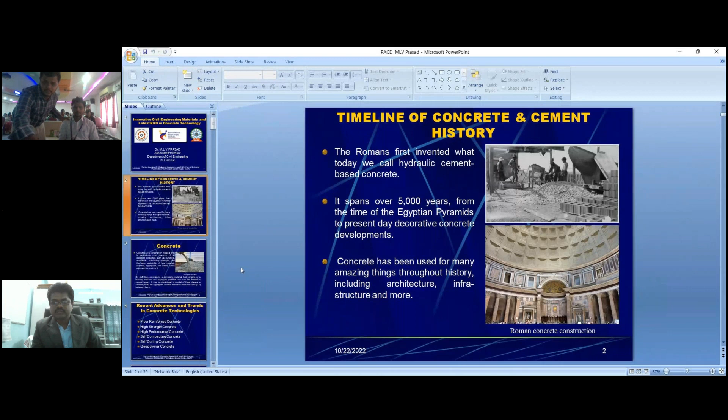So now we will discuss about the concrete.

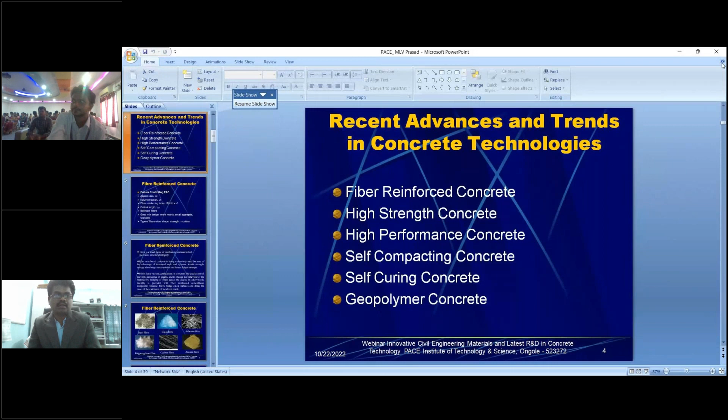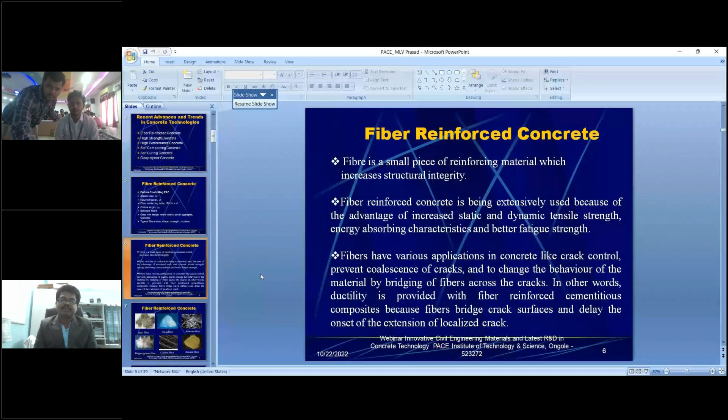If you take fiber reinforced concrete, I will tell you the advantage and where we will use it. Before that, we will see the different types of fibers we have: steel fiber, glass fiber, asbestos fiber, polypropylene fiber, carbon fiber, aramid fiber, like that.

So many new things are coming. Some are useful at the micro level, some at the macro level. So basically, wherever I want to develop the tensile strength of the concrete, increase the modulus of rupture, Young's modulus, flexural strength values, then automatically I prefer fiber reinforced concrete.

Suppose you are constructing a slab, and the rainy period is very high, there is a chance of leakage of water from the slab. Then you can go for fiber reinforced concrete.

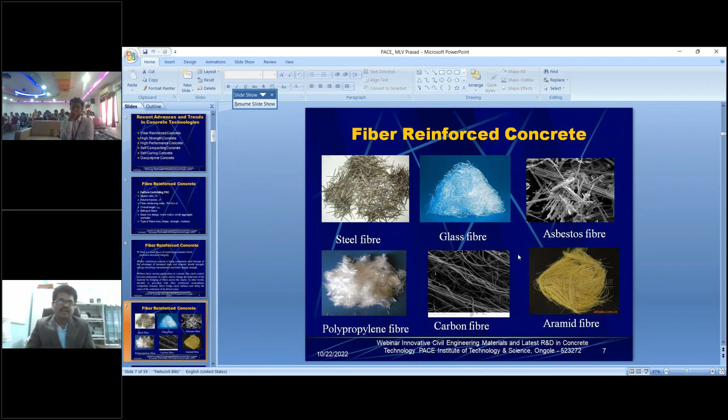If you use fiber reinforced concrete, the advantage is it is going to arrest the cracks, and make the concrete in such a way that there is no leakage, because fibers are very good in arresting cracks and have very good bonding with the concrete. So this is going to be useful.

If you see the fiber reinforced concrete stress strain diagram, after ultimate, if you see the area under the curve, A1 and A2, indirectly we are improving the ductility of the concrete. Ductility means toughness of the concrete. Total area divided by area of A1, that will give you the toughness of the concrete.

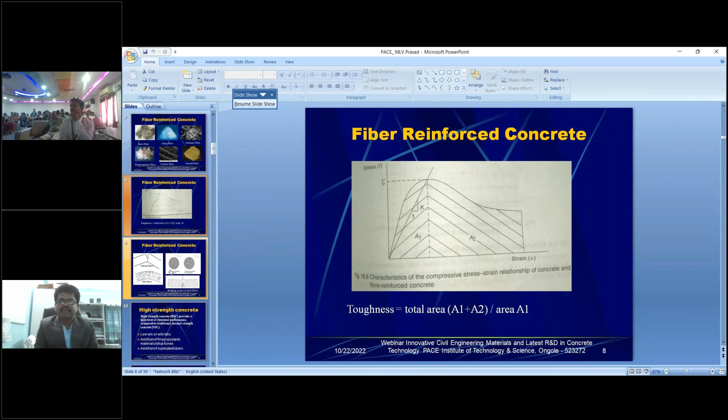So without fibers it is going to be very brittle, but with fibers, rupturing of the concrete or flexural rigidity is going to be very much improved by utilizing fiber reinforced concrete. So nowadays so many types of fibers have come.

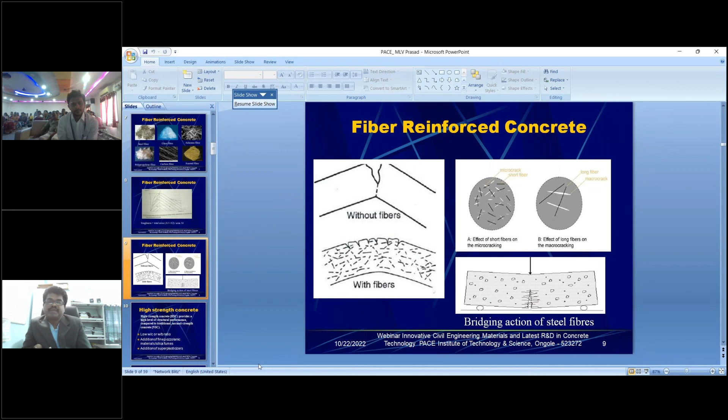Even in FRP, in retrofitting techniques also we are going to use these sheets. So this is a very wonderful material which improves the tensile properties, modulus of rupture, flexural properties of the concrete. Based on the requirement, we decide whether fiber reinforced concrete is used or not.

Next, coming to high strength concrete - we already discussed normal strength concrete. In normal strength concrete, we can achieve up to a grade of M50 or M55. After that, I am not able to develop the concrete further.

So suppose if you are in metropolitan cities where the land cost is very high, in those cases definitely we have to go for high-rise buildings.

Let us say G plus 10, G plus 20, G plus 30 like that. If you are going like that, automatically you have to develop a high strength concrete which has higher strength characteristics. Mainly in the columns we are going to use M60, M80 like that. Suppose I am constructing something in New Mumbai, then definitely it is going to be G plus 50 or G plus 80. I cannot waste my land, so for that purpose, definitely I have to think about high strength concrete.

So in case of high strength concrete, there are certain conditions. If I want to get a high strength concrete, I have to maintain a low water cement ratio. Then addition of fine pozzolana materials like silica fume, fly ash, GGBS, metakaolin, rice husk ash, like that. We have to add some pozzolanas to improve the pozzolanic activity and to get the high strength concrete.

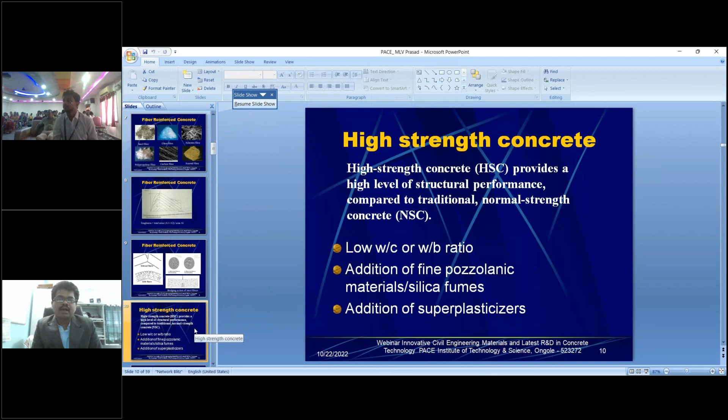So now, if you go to the high strength concrete, how to prepare it? What is the simple difference between normal strength concrete and high strength concrete?

If I want to get more benefit, there should be some limitations on material usage. When it is used for high-rise buildings, the sizes are going to be slenderer, so there is a limitation on the coarse aggregate content. That means the size of the coarse aggregate is going to be reduced to a maximum of 16 or less, otherwise I will go for 12 only.

And definitely I am going to use supplementary cementitious materials like fly ash, silica fume and others, but different dosages are fixed based on the different type of material. Suppose it is silica fume - since silica fume has high water absorption capacity, high range admixtures are used as a super plasticizer when silica fume is added. That's why its dosage is only 5 to 10%.

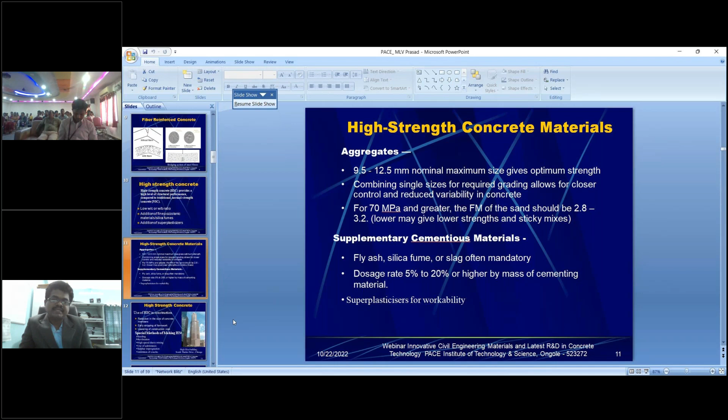But if I am using fly ash, I can go up to 20 to 25%, even up to 30%. Silica fume, fly ash, GGBS - all are ashes only, but there is a small change in the collection process. Based on how you are collecting them, they are given different names. Nowadays even JSW is using slag, which is also one type of ash. But depending on how you collect it and its fineness, we give different naming to these materials.

In case of high rise buildings, let's say G plus 80 or G plus 100, strength is a very important parameter. So in those cases there should be reduced size in the member, early stripping of formwork, and lowering of construction cost - all these are very important parameters, so we keep all these in mind.

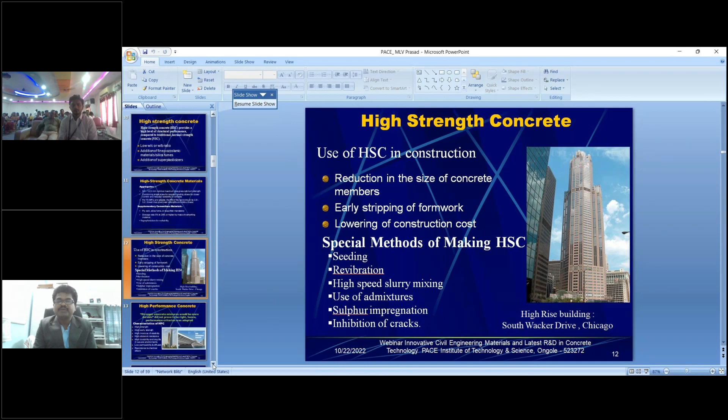And there are different methods of developing high strength concrete. Even IS 10262, whatever is newly developed, gives the option of developing the concrete. But earlier, by using IS 10262 - as a student, what I will say is you should be thorough with the codes.

What are the codes available?

Civil engineering is very easy if you know the source material. I always recommend civil engineers, as they have better opportunities compared to other branches. Why? Because nowadays computer science is the common language for every person.

For example, suppose I want to develop a mix design, even for high strength concrete or self-compacting concrete. If you go in a manual way, it will take so much time. Instead, if you write some coding to develop the mix design using the same procedure, you just give the input and it will give the output. Since you are third and fourth year students, my sincere suggestion is to start with something simple.

First, try to write a program for the mix design as per IS 10262. Let's take an M40 grade concrete. What data do you give as input? If I give the properties of the cement, the properties of the coarse aggregate, the properties of the fine aggregate, and the water-cement ratio, all these things are calculated step by step. So try to prepare an Excel sheet first for the mix design.

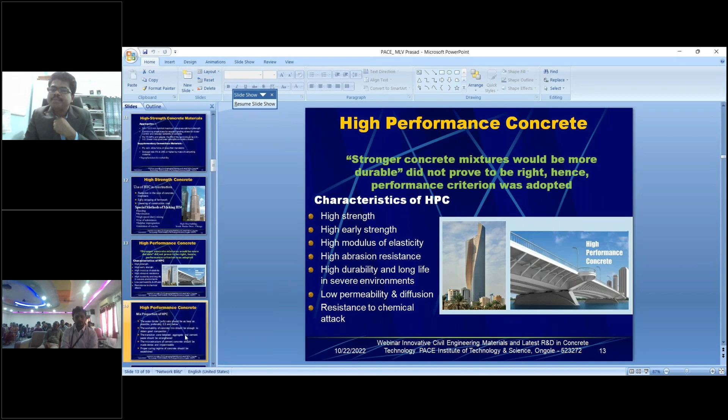Then obviously for high strength or high performance, we are going to have a lower water binder ratio - I say water binder, not water cement, because whatever cement is required for the hydration process and to gain strength, that much of cement only I am going to use. I am not going to use cement as a filler material or as fine material. Whatever minimum cement is required for hydration and to get strength, that much only I am going to use here.

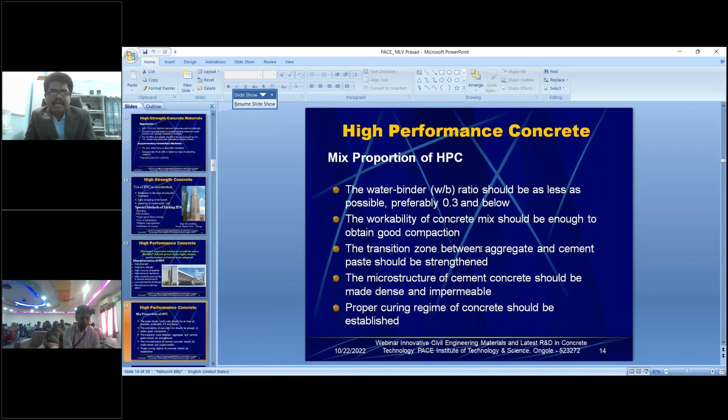Then the other part I am using as a binder - I will add fly ash, or GGBS, or silica fume. Like that, there are some changes I have done in the preparation of the mixes, and I am going to see that I am able to develop the high performance concrete. Obviously, whenever it is not durable, you can see here what are the durability problems.

Abrasion resistance, blast resistance, permeability should be impermeable. Actually, concrete should be impermeable. Then there should not be any carbonation problem, and it should have freezing and thawing resistance.

Durability criteria means that once concrete is developed, it definitely undergoes some deterioration with time. If it is continuously deteriorating, obviously you will see durability problems. What are these durability problems? Alkali aggregate reaction, sulfate attack, acid attack, freezing, thawing, abrasion - all these are durability problems. So we have to develop a concrete which can resist all these.

Even in adverse environments, if sulfate attack is present, take seashore areas for example. If construction is near a seashore, or near the sea, like IIT Bombay or NIT Surathkal, they are very near to the sea. Whatever buildings you construct there are going to have the sulfate attack problem. This sulfur forms a layer on the surface of the walls, and that creates the problem.

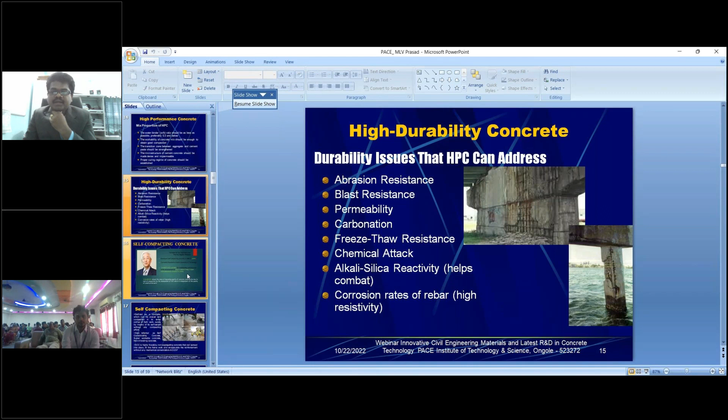So we initially started with lime mortar. Lime mortar is actually good, but it takes so much time. You have to grind it for many hours before you can use it as mortar. Strength-wise it is good, but time-wise preparing lime mortar takes too long, and that much time is not available to us now. That's why we developed cement.

After normal strength concrete, we thought that for multi-storied buildings, normal strength is not sufficient - I have to go for high rise buildings, so we needed high strength concrete. Then, with failures we observed, it tends to fail suddenly. There is no time gap, and it is not durable. It gives strength, but if it is not durable, it is useless. Then we thought of high performance concrete.

Even high performance concrete is good performance-wise, but the problem is from a cost point of view. Developing high performance concrete requires skilled labor, because so many technical aspects are involved - super mineral admixtures, chemical admixtures. I have to prepare it with good materials and need technically qualified labor. But nowadays, getting materials is easier than getting labor. Labor costs around 700 to 800 rupees per day per laborer. Even using 6 laborers to prepare 1 cubic meter of concrete, we end up spending around 10,000 rupees per cubic meter - and that's a minimum estimate. With this, constructing a multi-storied building using this much technically qualified labor is not going to be economical.

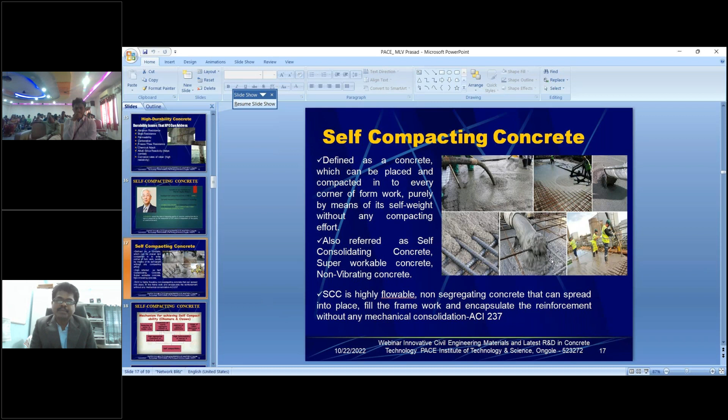In ready mixed concrete, generally they will make it as a flowable concrete. But here the difference is, if you see in the figure, they simply pour it with no need to use any instrument to compact it, because the mix proportion itself is prepared like that.

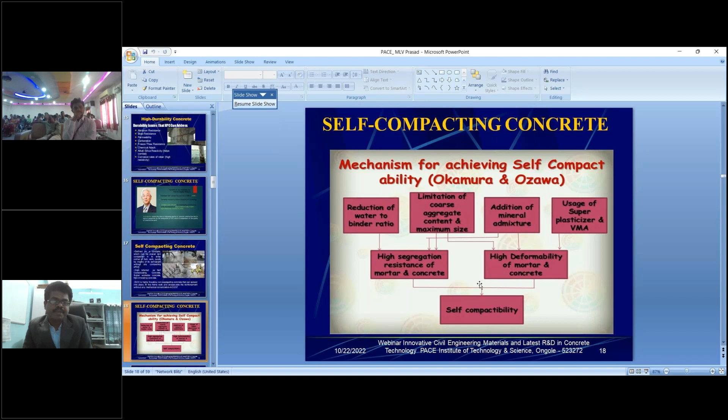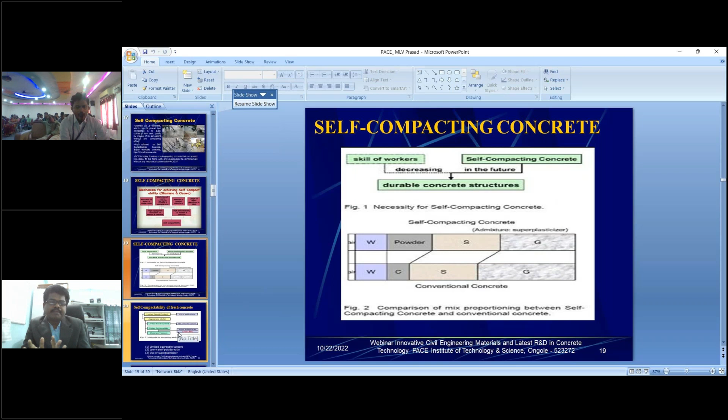When developing a self compacting concrete, basically three things are important: passing ability, flowability, and segregation resistance. These three things are important. We are going to say any concrete can pass when it has passing ability, flowability, and segregation resistance.

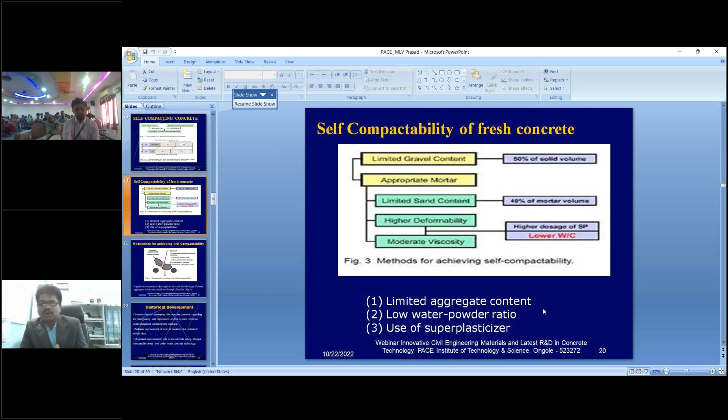So initially we are going to have the fresh concrete properties. To get the required fresh concrete properties, there are some limitations: 50% of solid volume, then 40% of mortar volume, then high doses of SP, low water cement ratio. All these things we are going to maintain here to develop these properties.

Particularly what happens, whenever you are thinking about a high strength concrete or high performance concrete, definitely there the reinforcement level is also going to be very congested. There is no chance of compaction also. Even if you think your budget is less and you want to go for normal concrete, there is no chance of compaction. So that's why there is no alternative other than self compacting concrete.

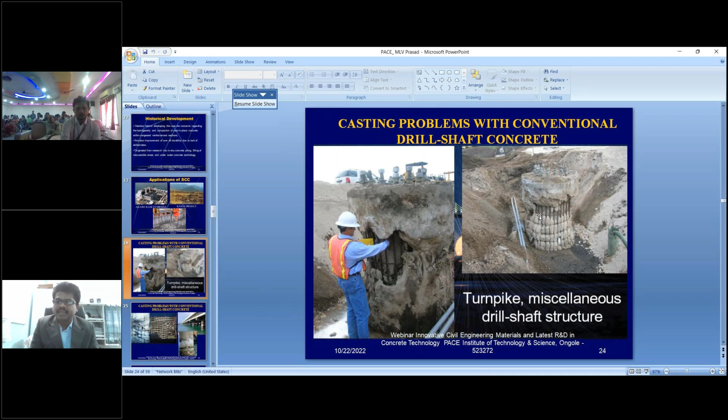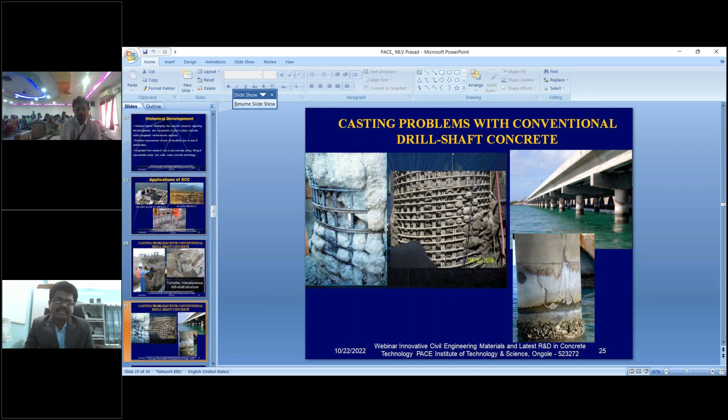That's why, particularly in congested situations when you are constructing bridge piers, abutments, embankments and all these, the requirement of steel is very high, and obviously it is going to be congested. In all these cases, self compacting concrete is going to be a very good material. These are some benefits.

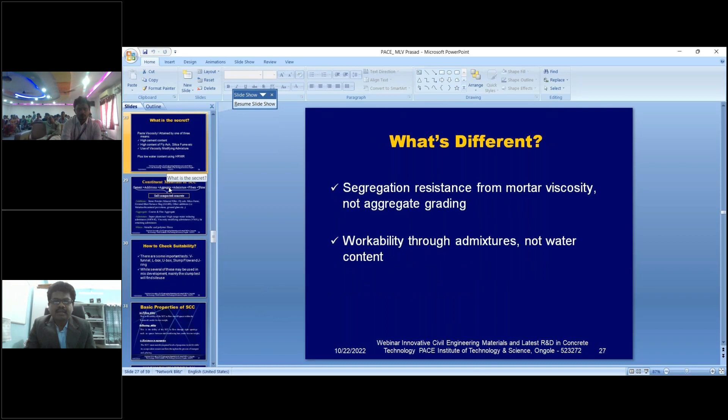What is the constituent material we are going to use, and what are the basic properties, basic tests we are going to see - I will tell you.

So obviously here it is a combination of cement plus additions like some binders, then aggregate, admixture. Even if you want, you can add fiber reinforcement also, no problem. Otherwise, you can develop a self-compacting concrete. But here, EFNARC guidelines are very, very important to develop all this.

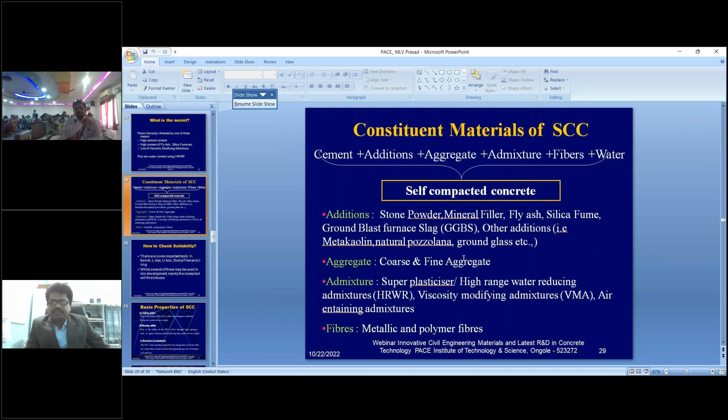These are the regular materials we are going to use, already told to you. But EFNARC has given some specifications particularly to develop this concrete. It has even given some limitations. For example, there should not be generally a cement limit the way our IS code gives a maximum limit - here in SCC they have given a minimum limit also.

Minimum 400 kgs of powder is required to develop any grade of concrete. Without 400 kgs of finer material - I am not saying cement, I am saying the finer content, whatever you are taking in the form of cement or binder - that should be a minimum of 400 kgs and above. Then only you are able to develop the self-compacting concrete.

Then there is a limitation on the water-cement ratio, and a limitation on the water also. They say in no case should you go more than 200 liters of water per meter cube of concrete - 200 kgs or 200 liters, because for water liter or kg is the same, since the density is the same. Okay, and like that so many limitations are there.

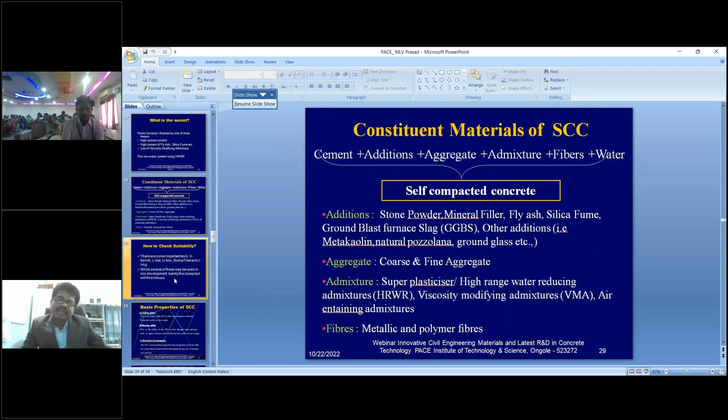If you follow that, then automatically you are able to get the self-compacting concrete. But how to check the suitability? How can I say it is a self-compacting concrete? For that, EFNARC, the European Federation, has given some guidelines called EFNARC, revised in 2005, with further revisions after that. If you type in Google just EFNARC specifications, you will get the complete booklet in PDF form.

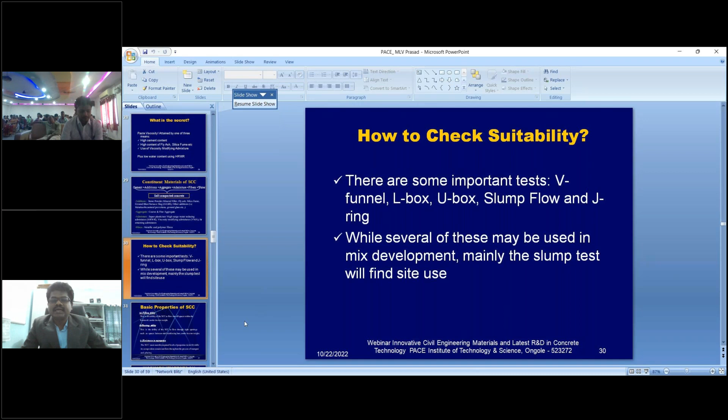So in that they have given this test procedure. When I am preparing an SCC, it should pass three tests: passing ability, filling ability, and resistance to segregation. Filling ability means, suppose if I am filling in any...

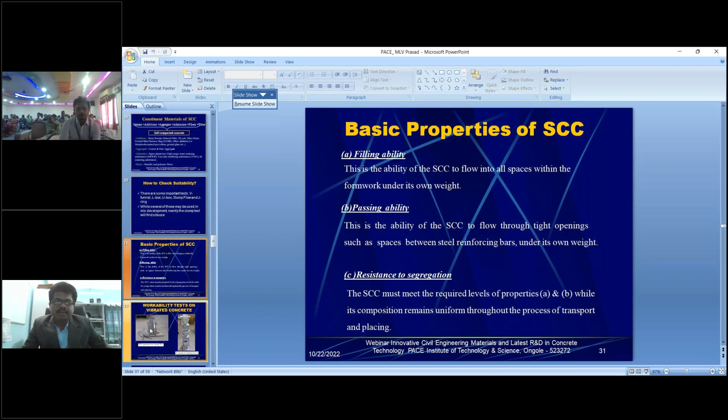Because here also we are going to do the workability test. So let's say, for example, if I am filling the cone and removing it, it should flow on its own weight - that is filling ability.

Then passing ability - for example, if you have a J-ring, with the J-ring I can check the passing ability. Passing ability means if some obstruction in the form of reinforcement is coming, the concrete should still pass through that obstruction without any problem. Inside the ring, outside the ring, if you measure the height of the concrete, it should show the same height. Then I can say it has passed the passing ability test.

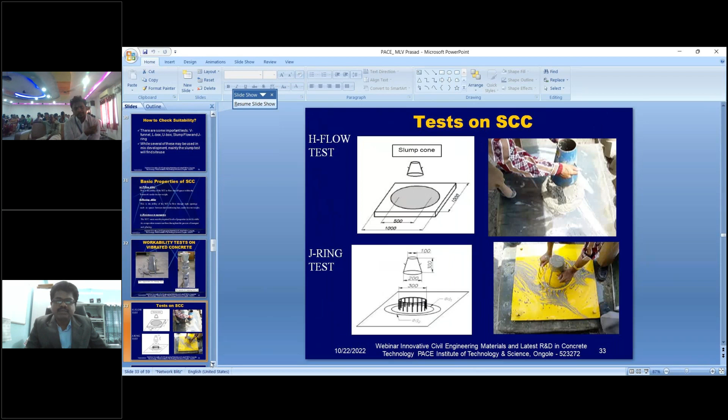Then after that I have to wait for 5 minutes, then release this knob. At that time, it may take a maximum of 2 to 3 seconds extra. Suppose earlier it took 10 seconds, now this time it may take 12 to 13 seconds.

If it is within that limit, then I can say - the main idea here is, I am pouring it in the V-funnel and waiting for 5 minutes. During this 5 minutes, it should not stick to the walls, and there should not be any problem with segregation resistance. If it is sticking to the walls, obviously it will take so much more time.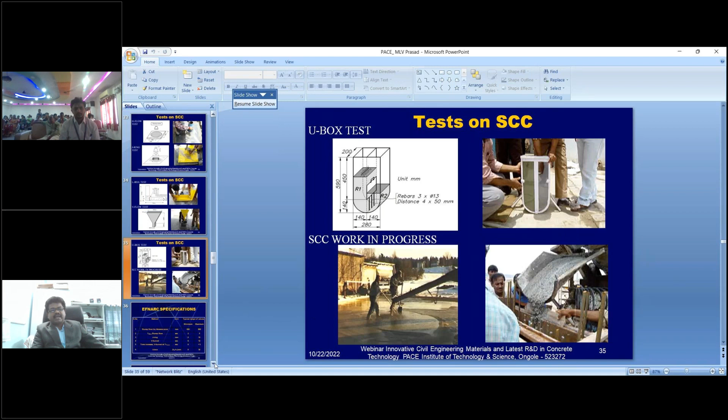Similarly, L box, U box, all these are there. Basically our idea is it should pass three tests: passing ability, flow ability, and segregation test. If it is passing all these three tests, then I can say it is a self compacting concrete.

So I told you already some EFNARC specifications are there for these, for slump flow, T50cm slump flow. Then J-ring means the difference of height between inside concrete and outside concrete should be maximum 10 mm. Then V funnel also 6 to 12 seconds, already told you. T 5 minutes means plus 3 seconds extra it may take.

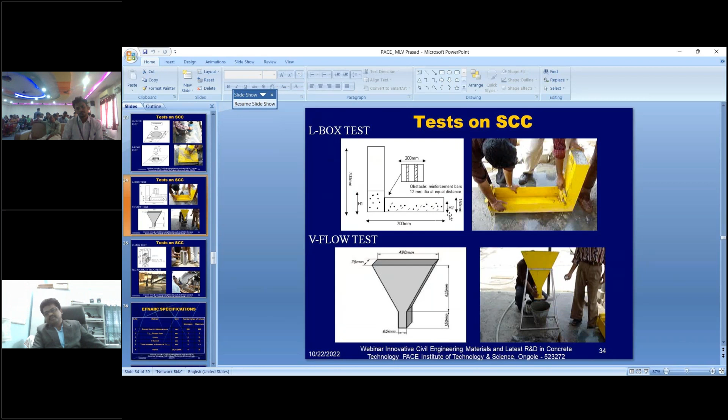Similarly L box also, when we are releasing from the L box, the height difference matters because it is coming in the horizontal level. Let us say if I am calling this side H1 and this side H2, the height difference should not be greater than 10 mm. So like that, some precautions and test data are given in the EFNARC. If it satisfies these three conditions, then I can say it is a self-compacting concrete.

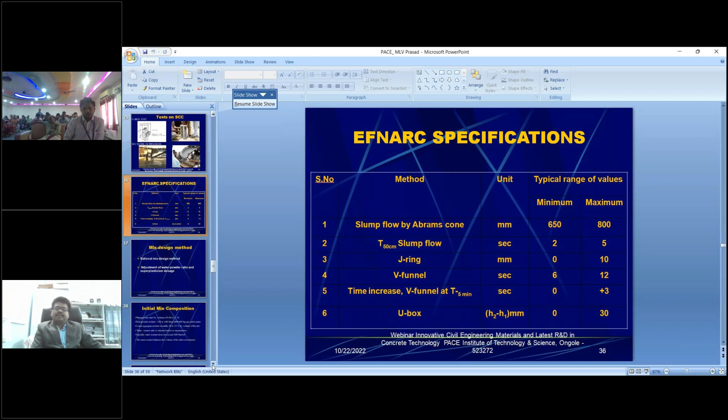So we thought initially we started with the lime mortar, then we came to the cement, then high strength concrete, then high performance concrete, then we came to self compacting concrete. But for self compacting concrete, practically for small quantities you cannot do it, definitely batching plant is required, because compactability should come from the mix design itself. So it is not that easy to prepare it manually with small quantities.

Definitely batching plant should be there, there should be a transportation system for the material, then pouring system, pipeline system, everything is required. So still, okay, technically you are able to develop a good material, but the problem is if you see from the environmental side, you are using cement, you are using a good amount of cement. If I am preparing a construction using cement, indirectly I am developing carbon dioxide. So environmentally there is a burden, even though some part of fly ash, GGBS, these things you are using, and some environmental friendly materials you are using in the form of replacing sand, replacing coarse aggregate and all that. But mainly there is a burden on the environment.

You have to think in the direction of sustainability. Best example I will say: suppose nowadays if you are getting a 500 ml bottle for 10 rupees. At least this you have to maintain for your future generation also, so your children, grandchildren also are able to get the same rate for this water after 20 years also. Then I can say I have maintained sustainability.

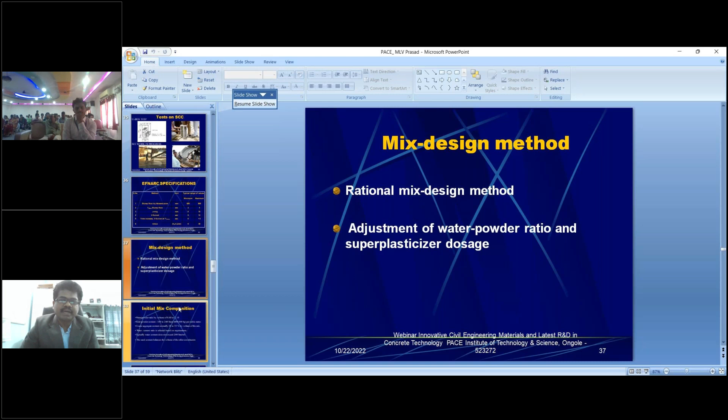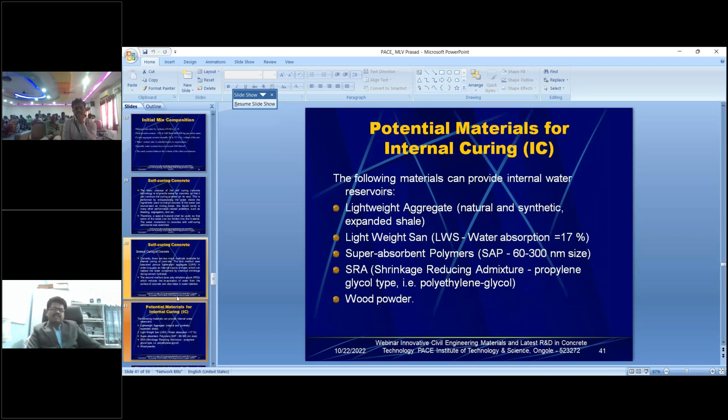Self curing is also there. Self curing is very simple, similar to self compacting, but here we are going to use some self curing agents. Let me give you the example of liquid paraffin wax. Light is there, heavy is there, so some dosages are used for self curing.

Mainly what happens is, as I told you, now even for drinking purposes we are not able to get water. Then from where will you get water for curing purpose? Because you have to use potable water, clean water, almost drinkable water. So now that water is not available everywhere, that's why this self curing concept came into picture.

It can be internal curing or external curing. If you add a curing agent to it, it will take care of it and there's no need to worry, because there is no water to cure it for 20 days or 40 days. How can you cure it then? So that technique has also come now.

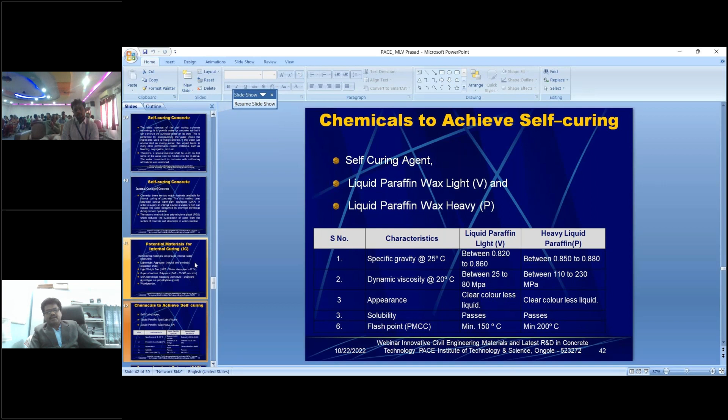Even if you see L&T constructing in Hyderabad, whatever metro works it is doing, there they have simply used this self curing agent. They simply prepare the piers and leave them, applying a simple epoxy coating.

Whatever water is added in the initial stage for the water cement ratio for the hydration process, the same water is maintained for 28 days for this hydration process to go through at a lower constant temperature, because you have to maintain the temperature during hydration. That's why you need the water, that is the main thing.

So during the hydration process, though there is so much temperature development, you have to control it. That's why we go for different types of curing. But here, with this epoxy coating, whatever water is added in the initial stage stays there and takes care of the curing part. So this is also one of the developments.

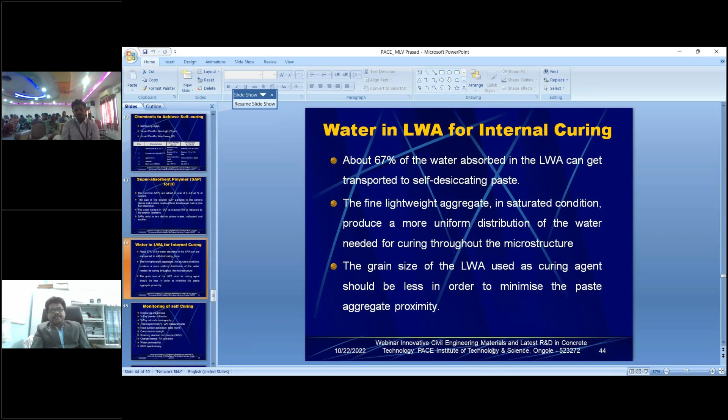But I am not going to say much more about self curing. I want to discuss geopolymer concrete because it is a very good idea. See, even now, whether it is self compacting or self curing, you are still using cement and harming the environment. Once I use cement, indirectly I am producing carbon dioxide, greenhouse gas problems will come, and so many other problems come. So try to avoid utilization of cement. This is called no cement concrete.

So in geopolymer concrete, actually we are not going to use any type of cement. Simply we are going to use alkaline binders, with complete replacement of Portland cement with fly ash and GGBS. We are going to develop an environmental friendly concrete through this geopolymerization process.

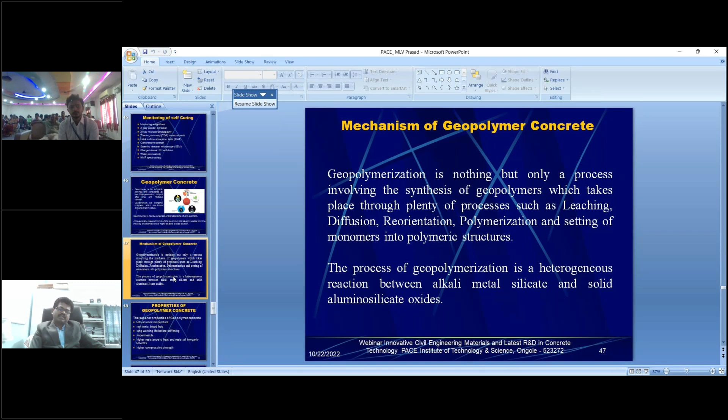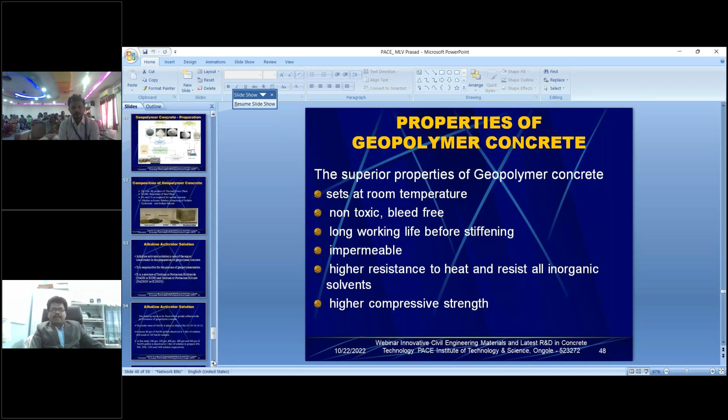Actually what I am going to do is use some binders in the form of fly ash or GGBS, and use some alkaline solution, and from this develop the geopolymerization and geopolymer concrete.

This is expressed in the form of molarity. Suppose if I am using NaOH, you know that NaOH is 40 grams - Na is 23, oxygen is 16, H is 1, total 40 grams. So if I want to prepare a 1 molar solution of NaOH, meaning for 40 grams of NaOH, I have to add 1 liter of distilled water.

Similarly, if I want to develop a 10 molar solution, 10 molar means 40 into 10, so 400 grams of NaOH, and if I add 1 liter of water, then automatically I can prepare a 10 molar NaOH solution.

With respect to molarity, we have to prepare the alkaline solution, and this alkaline solution is going to react with binders like GGBS or fly ash. This reaction is called geopolymerization.

If you go on increasing the molarity, you get the best results, but there is a problem with workability. If you keep increasing molarity continuously, workability suffers. So generally 10 to 12 molar solution is used in the preparation of geopolymer concrete.

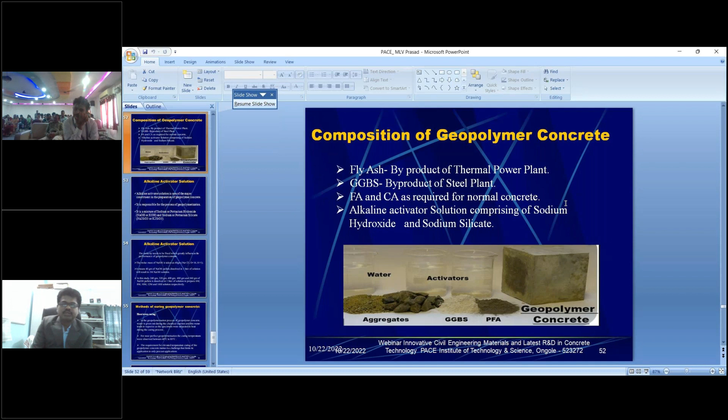We have also developed this geopolymer concrete, because I had to think of a concrete that would be environmentally friendly. So in that way we did research and developed this geopolymer concrete. Another problem in geopolymer concrete, as I already told you, is if you are developing fly ash based geopolymer concrete, you have to go for elevated temperature. But without that, how to do it? In that direction we worked, and we got a patent.

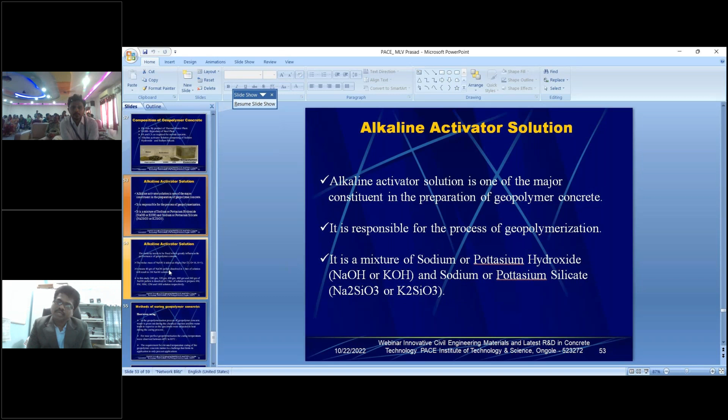There are so many ways of getting a patent. If possible, on another day, I will explain how to patent any product, and what is a startup program.

From our institute side, I am the ambassador for the institute innovation cell. Ambassador means - there's no need to do all this, but I am upgrading myself. I am in contact with other institutes, like private colleges, including several in Bangalore. Through this institute innovation cell, we share our ideas and train them too. Whatever knowledge I have, I share with them - we share with the students. I even give startup trainings. We also have a startup program here.

Nowadays the government says even though ours is a government college, in future you have to sustain on your own, they are not going to give any money. They have clearly declared that for NIT, okay, they are paying the salary now, but afterwards the target is self-sustainability. You have to develop your own budget through consultancy, through startup, through IP, patents. Simply they are going to pay on an hourly basis. Suppose if they contact me for 2 hours per day, that much money only they will pay, and they will say that's your wish, do any business after the 2 hours, we have no problem. But you are no longer going to be a permanent employee of any individual institute. That is the future coming. So you have to update yourself. No one should think about a government job, because nowadays no government job is required. If you have the skills, automatically you can shine.

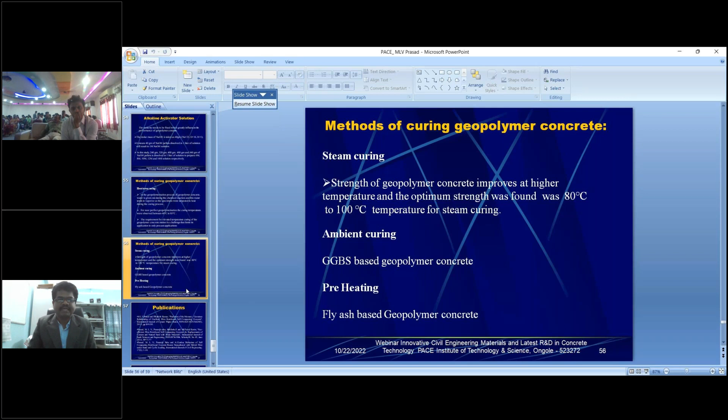Right now geopolymer concrete is developed mainly with two things: one is binder, another is a solution - alkaline solution. There is an alkaline reaction, geopolymerization is going to happen instead of the hydration process. Because of this geopolymerization, extra water will be added just to get the workability, not related to the strength at all. So some water is also added here, and some publications also there, sir.

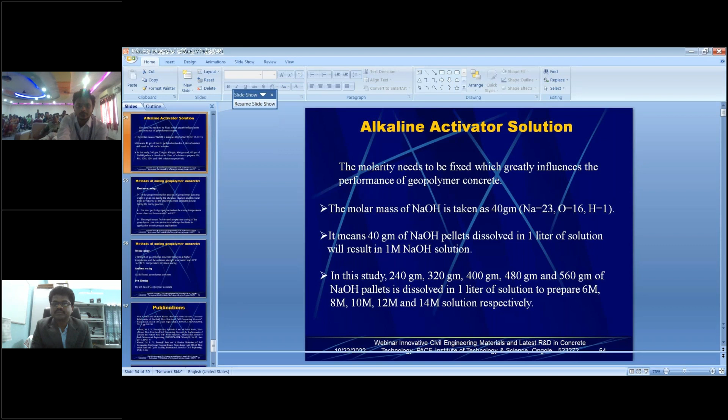Is it visible, sir? Yes, sir, yes, sir, yes, sir. You can take it, visible, na? We will continue after 10 minutes, sir. Yes, sir, we will continue after 5 to 10 minutes. Some important techniques are there that we will discuss. Okay, okay, okay, thank you. Okay, sir. Please be seated, just...

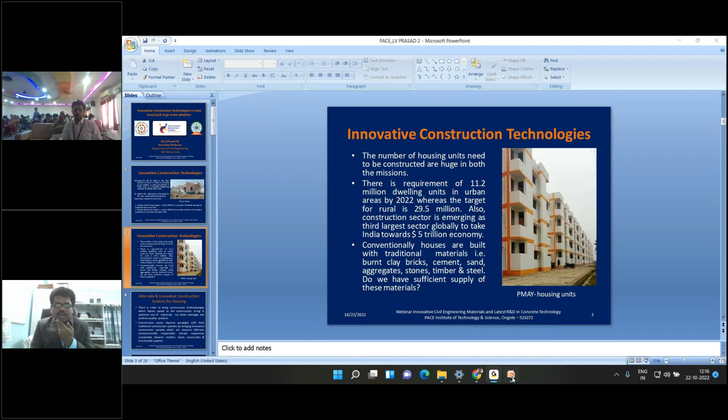If you see this construction, it is G plus 3. If you construct G plus 3 in a regular framed structure manner, it takes a lot of time and cost. But with Rajiv Gruhakalpa, Pradhan Mantri Awas Yojana, or Indiramma houses - whatever house construction is now taken care of by government, I think in Andhra L&T has taken this project - they simply construct using load bearing walls only, like a frame, and fill the walls with concrete, but of a lower grade. If preparing a wall with concrete, you don't need that much quality since a wall is just a partition, not a compression member requiring high strength. So as load bearing walls, nowadays they construct using these new latest techniques. Now we will see the different latest techniques available.

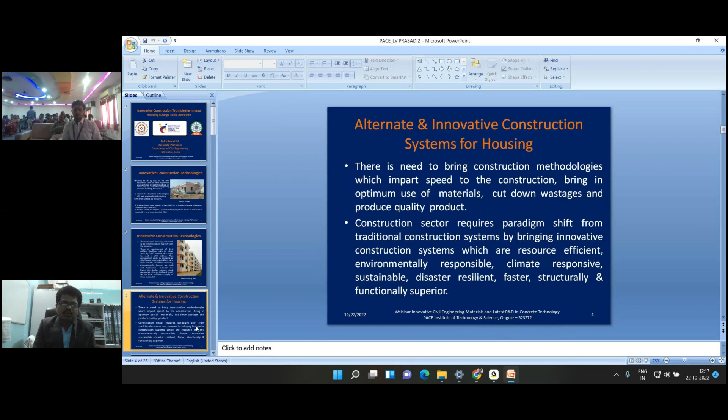First we will see how housing started. Basically housing started with old construction techniques like mud houses. The earth house is the beginning. Many of you have seen, and even now you can see in villages or forest areas mud houses with this type of roof covering - that is the start of housing. At that time, no bricks were used; everything was locally available.

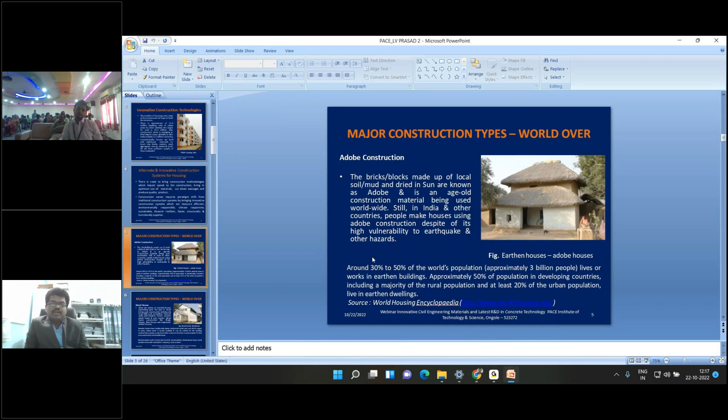With the earthen house, they are very user friendly, and there is no need of any cooler because they are very cool, being made with earth. After that, we came to wooden houses, constructing with wooden planks, because in some areas only wood construction is possible.

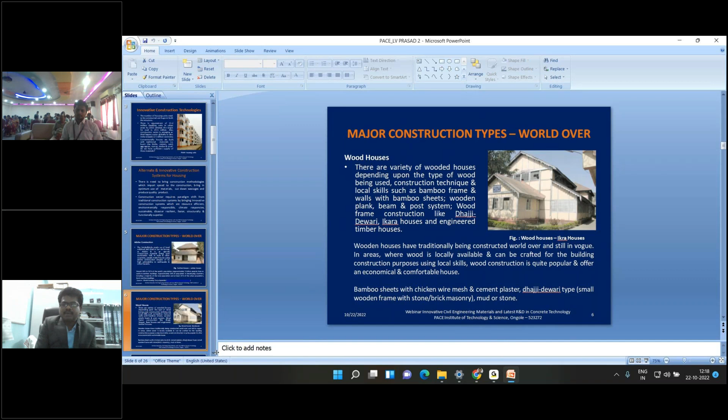Suppose it is a cold environment with temperature variation, you cannot maintain that with a mud earth house. So if I go for wood based construction, even in cold areas I can sustain the cold. So with locally available material, we started with earth, then slowly when we upgraded, we came to stone building also.

It is a development, and even nowadays in villages, we can still see these stone houses.

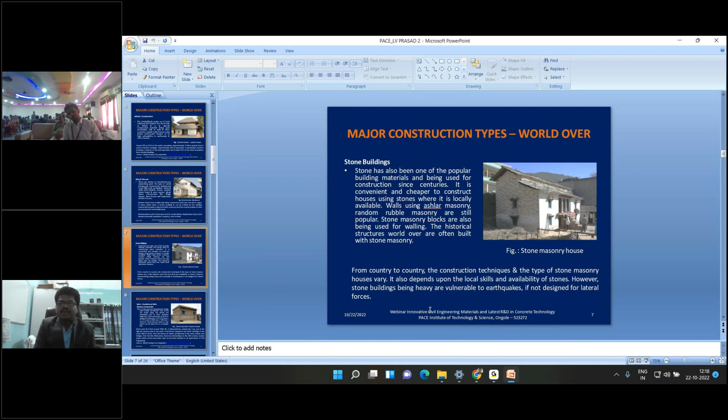Then after that we have brick and unreinforced brick masonry construction. That means after stone, brick came into existence. Initially we used mud but didn't know how to process it into a brick form. Because of upgradation in research, the same mud is used in the form of a brick, having a standard size, by burning it. So some technology was developed, and burnt clay bricks are used in masonry houses slowly after that.

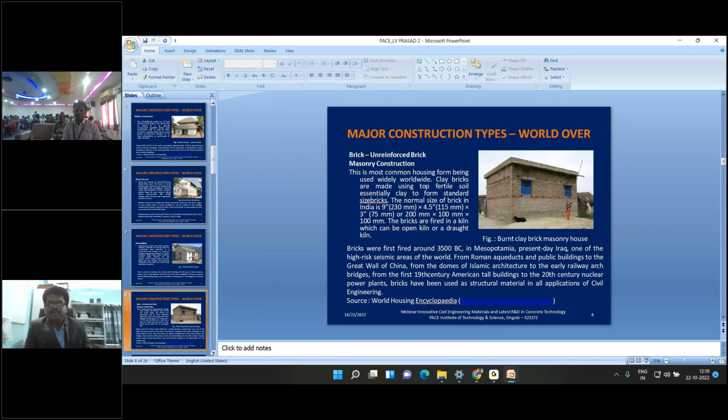With this we can go only single storied or maximum G plus 1. But after that, confined masonry construction came, which is brick masonry or stone masonry but with confined construction. That means in between we provide steel reinforcement, and confine it with some reinforcement like that.

Now whatever reinforced RCC structures we are using, they are confined masonry construction only. Masonry means it may be brick masonry or stone masonry, but now no one is going to use stone, because it is costlier, and the size of the stone is going to be very high.

In a framed structure, whatever partition wall we use, it is only a one brick wall. For a one brick wall, if you use stone, it will take 14-inch width. Unnecessarily you are wasting money and wasting space. That's why nowadays we simply use bricks only.

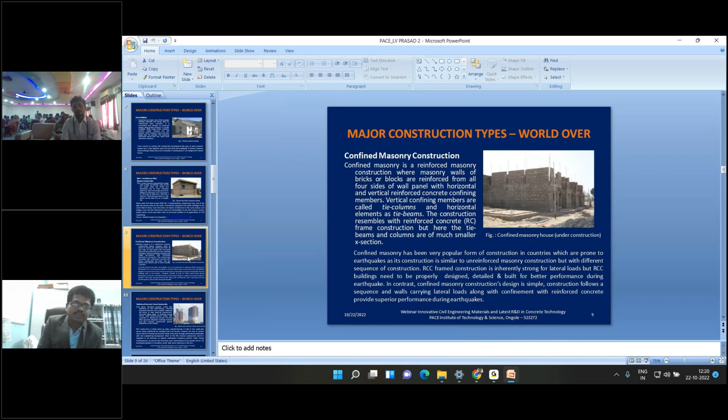But after that we have reinforced concrete frames. If you go for multi-storied structures, the industry developed from normal concrete to high strength concrete, high performance concrete, particularly in very costly areas, we go for high rise buildings with reinforced cement concrete. But is this the limit of thinking?

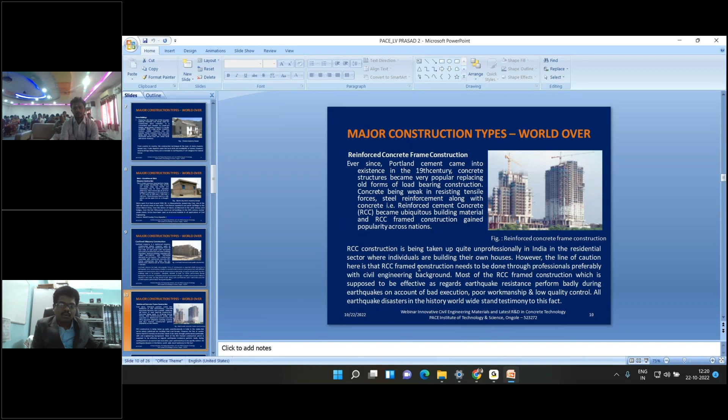No. After that we thought of major construction types, like structural steel frame buildings. Because in some places you want to construct at a faster rate, and you want your construction to last for a longer life while taking a small amount of time, then you can go for a steel frame. Even in airports, wherever you want large column to column spacing, a big hall or an auditorium, then obviously we will go for a structural steel frame.

A civil engineer's observation is very important. Suppose you are going to see a new area, first see what type of construction is there. If you see a railway station, an airport, or a bus stand, even our Hyderabad bus station, see how they constructed it, what technology they used, how many floors, any new technology used—you should have observation on the construction.

Suppose you take an auditorium, or an open air theater, or anywhere the spacing should be more, like your seminar hall—if it is a reinforced concrete structure, maximum they may have given about 40 feet width for your seminar hall.

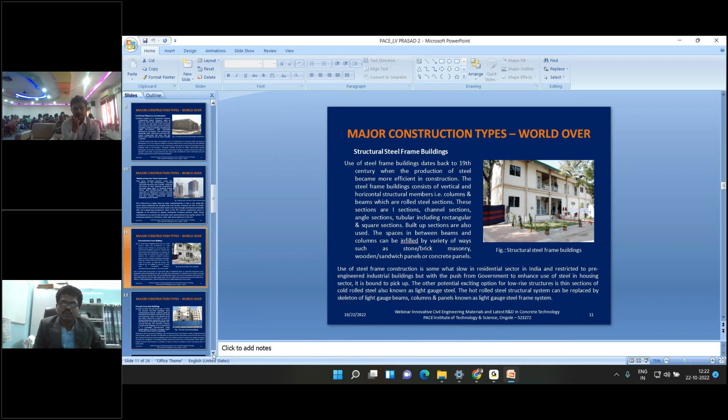After that, if you see the alternative innovative construction techniques, now in place of our conventional formwork, there is a formwork system replacing the conventional formwork, that I will show you. Then there is a replacement for the brick mortar or brick work with a sandwich panel. Then there is a replacement for the RCC framework with a steel framework. Then there is a replacement for this cast in situ, whatever you are doing with RCC, that is replaced with precast concrete.

Precast concrete means completely a single room is prepared with precast concrete. Simply they are going to keep these boxes one over the other and make the construction. So like that, so many developments have come into picture.

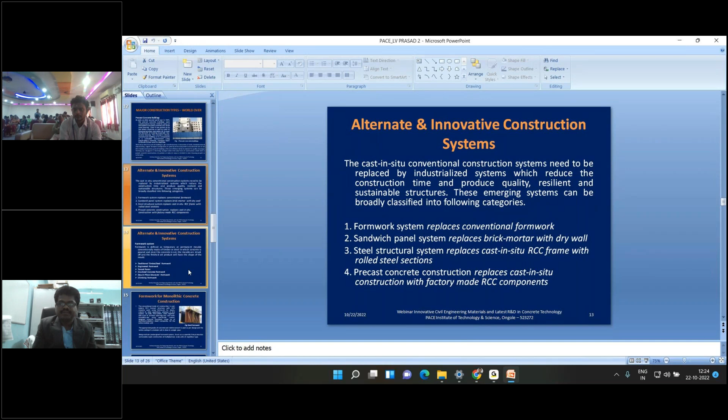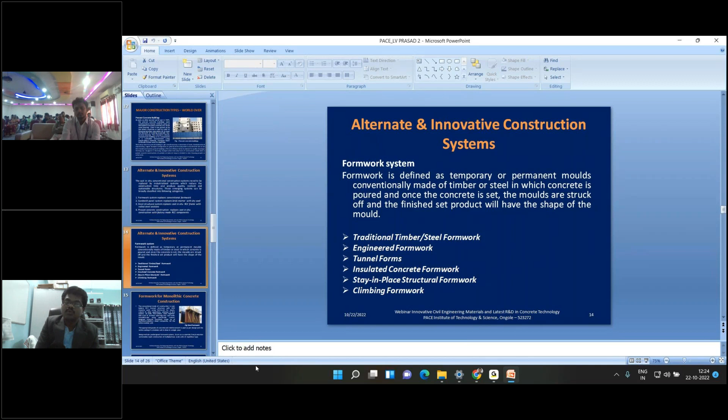If you take the formwork system, there are so many types of formwork: traditional timber formwork, timber or steel formwork, engineered formwork, tunnel formwork, insulated concrete formwork, or stay-in-place formwork. So the formwork we are using now has changed. We are seeing different types of formworks. It may be with a monolithic concrete formwork.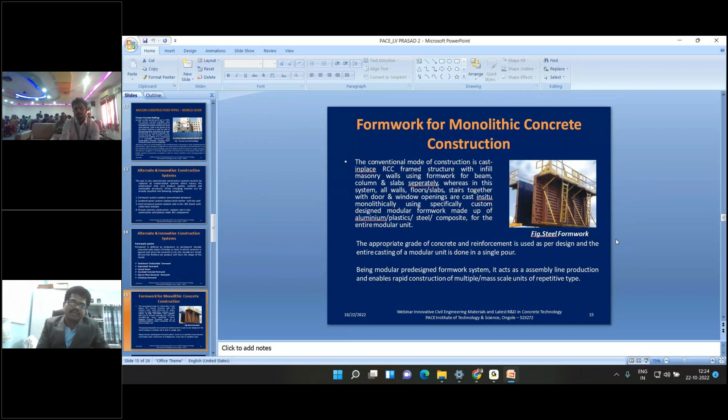That is one way. Then the other way is modular tunnel form. They are going to prepare a modular tunnel, then fill up these walls. Modular tunnel means first I am going to prepare this formwork, then I am going to fill it with cement mortar or concrete.

So these are the modular tunnel form. Directly, one floor I can prepare in a single stretch with the design requirement. First I will prepare the form, then fill it with the concrete or whatever material I want. So that technology nowadays we are using.

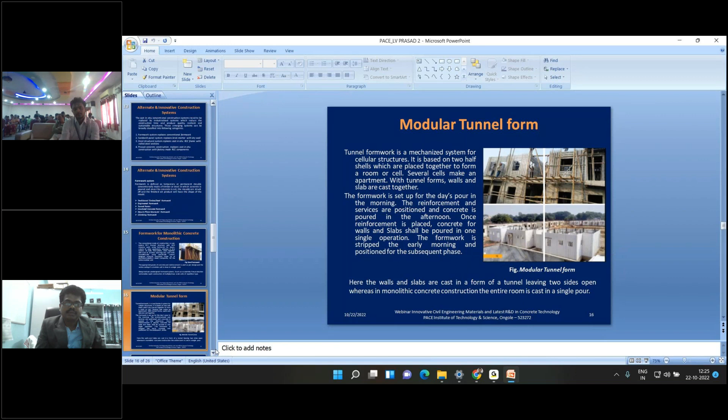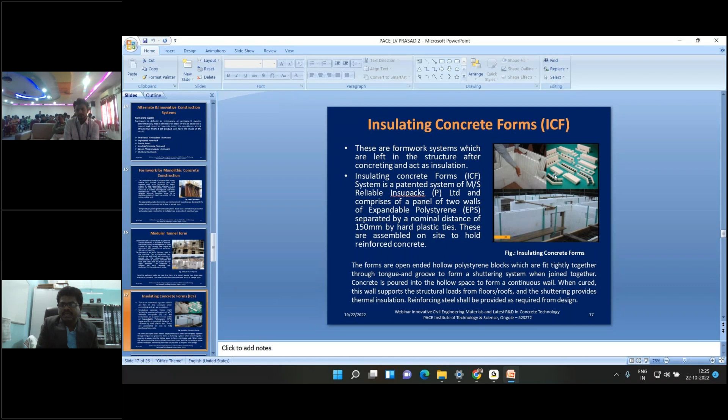Insulated concrete formwork - here we know that insulated material also can be used in this formwork. These are already ready-made. Simply they have a thickness for the outer wall and inside wall. Then initially they will prepare all this formwork.

Then, because now I have self-compacting concrete, I am going to fill it and also have the openings. Simply I am going to prepare where I need the window, where I need the wall. Then completely, it is just like your load bearing structure - with framework or without framework - that you have to choose based on the material you are using.

With framework also means I will go for foundation, then column, beam, like that. Then the remaining parts I will fill up with the formwork. Otherwise, without framework means you can do it completely.

Now L&T is doing this in government projects. They have succeeded in developing up to G+3, G+4 only with the formwork. This means all these walls are going to be concrete walls with light steel in it. The percentage of steel is very less, just like a shear wall. So all this is going to be one floor - they are going to fill it, and first they are going to make the formwork.

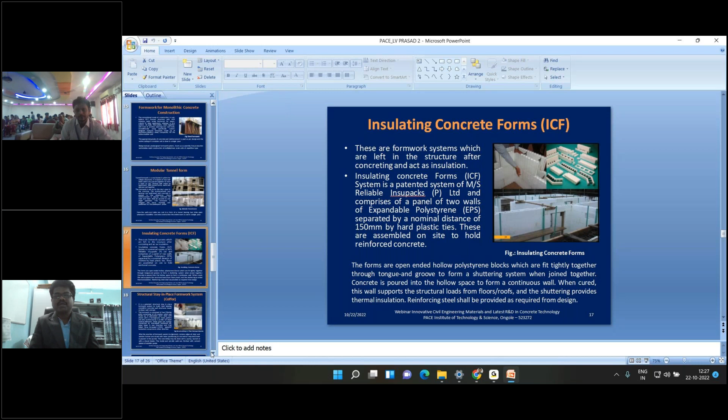Suppose you want a kitchen, then formwork is prepared. No column, no beam concept, no brickwork. Simply they prepare this formwork and make the formwork, then they fill it with concrete. That concrete is made using eco-friendly materials, so it is cheaper when compared to other materials, right?

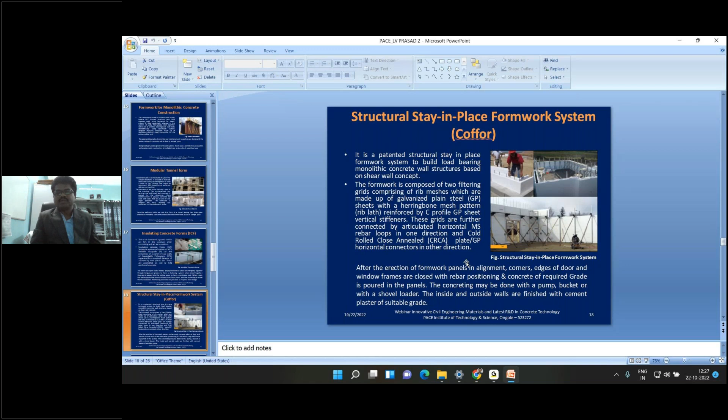So like that, nowadays so many new technologies are coming into picture. No need to go for your conventional framed structure, then preparing a frame, then constructing the brickwork, then going for plastering. All these things are not at all required. Directly it will come with a very smooth finish. No need of plastering, nothing. Simply you go for painting it. That's all. So like that, now the technology is here.

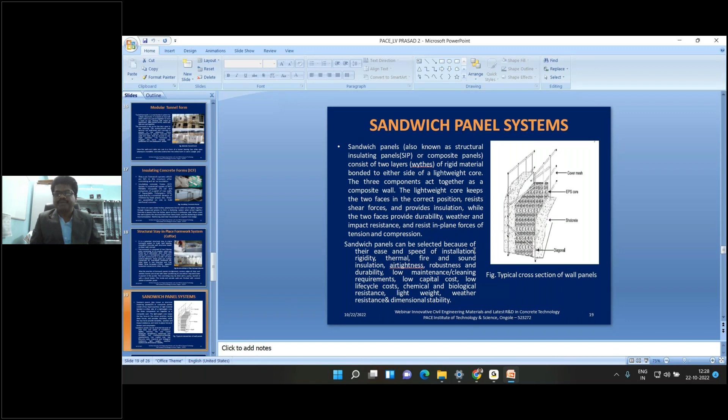So if you see the sandwich panel, earlier what we were doing is have the framework, then the brickwork. So instead of brickwork, directly with these sandwich panels you make the panel and directly fill it with the material. Nowadays so many materials are there, you have to choose. Even this 3D printing is also going to do the same. In this sandwich panel, you are preparing the formwork, then in between you fill this sandwich with the appropriate material, avoiding the brickwork.

If you see this sandwich panel system, first you prepare the framework like this, and these are going to have some thickness, so you fill this. First I have to make the frame, then this is all prepared with a very light cement mortar, simple concrete, very nominal grade of concrete. And in all the places, no need of steel wherever it is required. If it is a single house, single floor only, then no need of much steel also. If you are going for a multi-storied frame, then obviously...

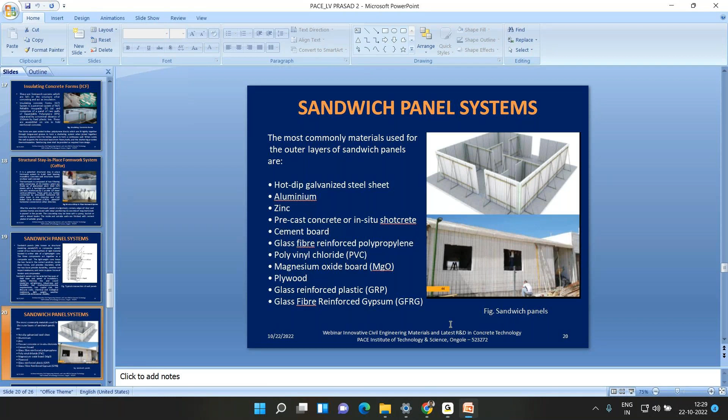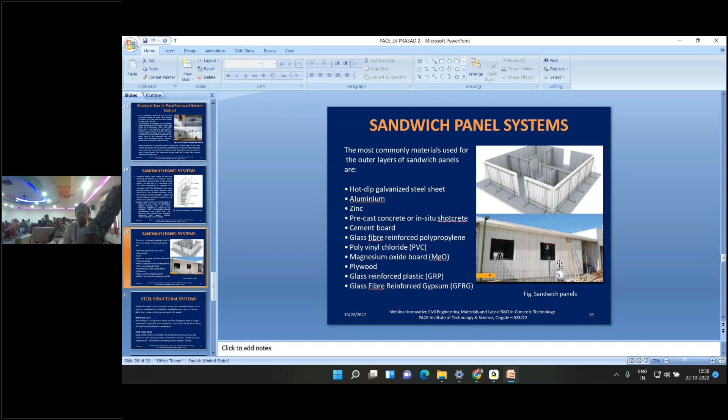So now what I want to say is, not only learn the basic subject, but go to the new concepts. Nowadays no one is going to do this regular practice of constructing a framed structure, then brickwork, then plastering, then painting. That much time is not available with anyone, and unnecessarily it is taking so much time. So nowadays, whatever systems we are having, you have to implement that, the steel framed structure.

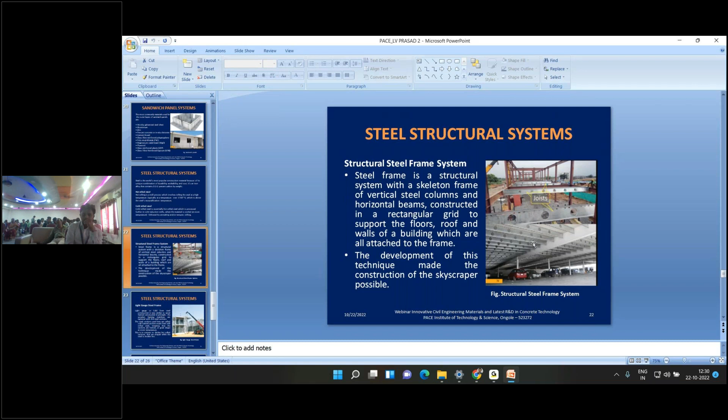Even recently, they extended the airport in Hyderabad. If you see the Rajiv Gandhi Airport Hyderabad, they went for a steel framed structure instead of regular practice, because regular practice takes so much time. Simply they made the steel frame structure, and over that they constructed using the regular practice. So like that, you have to utilize this for all these.

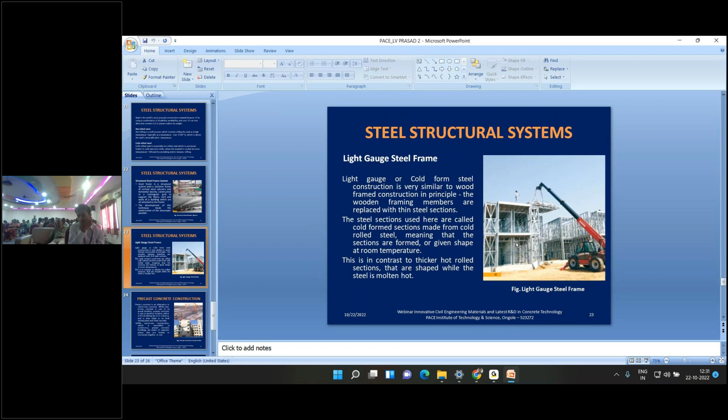Actually BMPTC is there, and if you go through the website, so many new technologies you can learn from there also. This is the steel structural system. Directly you can make a light gauge steel frame, or you can make an aluminum frame also. You know that for internal partitioning nowadays we are using only the aluminum frame, but earlier it was not like that.

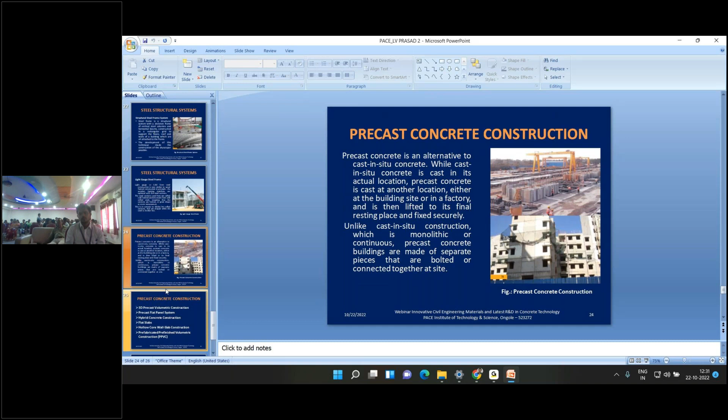So like that, even these prefabricated structural elements also—if you see the metro works, whatever L&T has done in Hyderabad, maximum elements are prefabricated. They only keep them at the site and connect them. So like that, you have to utilize the development and learn the new things. Only old things will not survive.

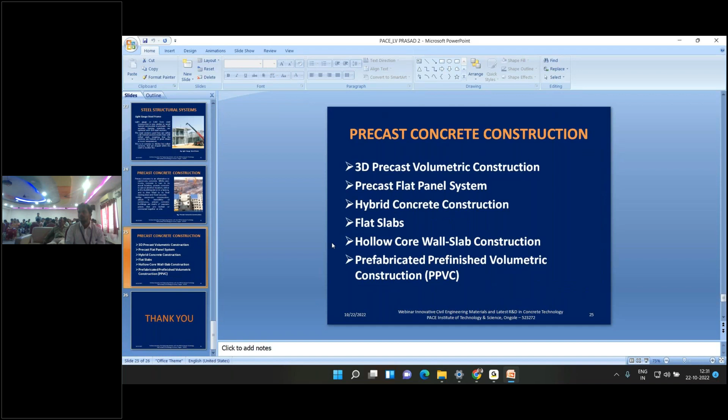Now 3D printing has come into picture. Initially they do the model. Even one house is constructed using 3D printing nowadays in India itself, they constructed the material. So my intention and what I want to say with you people is...

2:30, okay, I think it is closed.